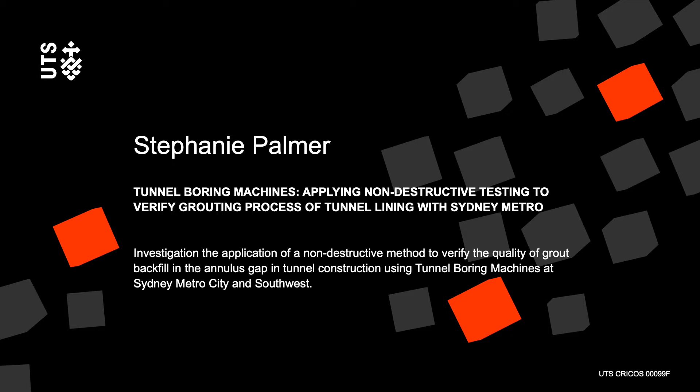Tunnel boring machines, applying non-destructive testing to verify grouting processes of tunnel lining with Sydney Metro. My name is Stephanie Palmer and I'm a civil and environmental engineering student.

Whilst working at Sydney Metro City and South West, I became absorbed in this once-in-a-generation tunnelling project. The scale was captivating and the enduring impact that it would have on shaping how Sydney-siders viewed public transport was tangible and exciting. In particular, I was intrigued by the structural fundamentals supporting tunnels, which are in fact monolithic underground structures.

Sydney Metro City and South West is Australia's largest public transport project, comprising 15 kilometres of circular twin tunnels, each with a diameter equivalent to 2 stories of an office building. Tunnel structural integrity relies on the segmental concrete lining. Concrete tunnel lining distributes external soil pressures across the circular tunnel shell.

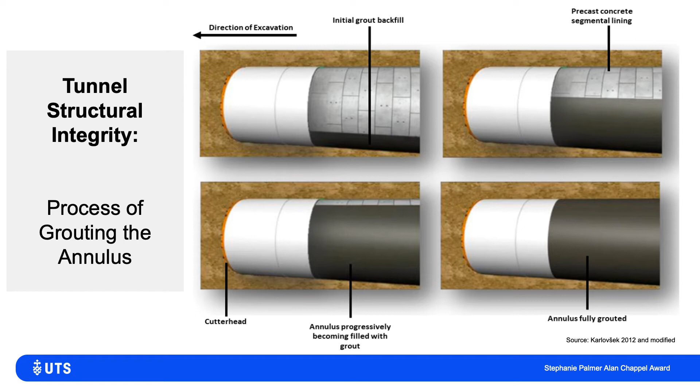Safe tunnel design is reliant on the uniform contact between this lining and the surrounding soil. Uniform contact is achieved by filling the circular or annular space between with grout. Any voids in the grout at this interface negate the purpose of this filling. However, undertaking quality control of the grout is challenging as the final product cannot be visually inspected.

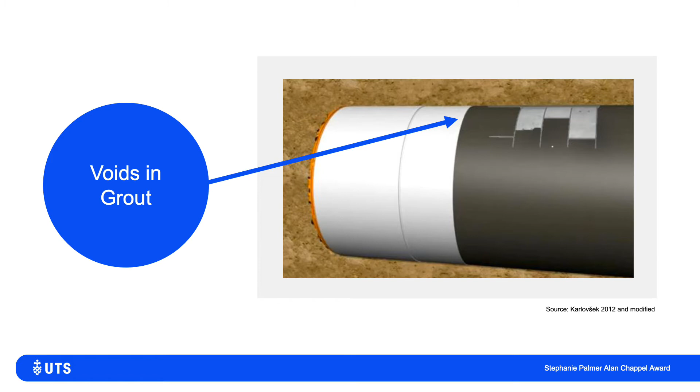Internationally, the accepted industry process to verify the completeness of grout in the annular gap is flawed, as it compromises the concrete lining by destructively drilling through it. To visually observe the gap, an endoscope is threaded through a hole drilled through the concrete lining. In other words, the only way to qualitatively check the annulus gap is to destructively drill.

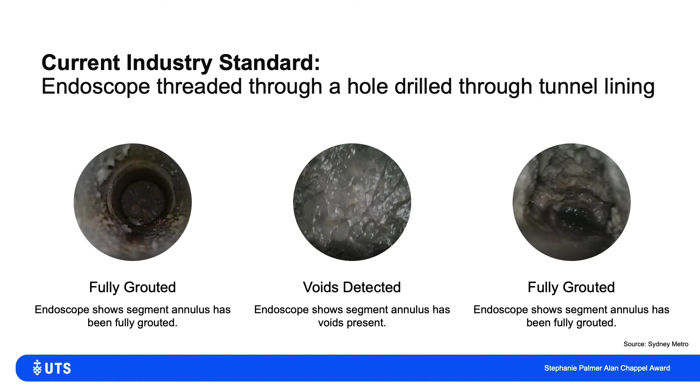This destructive method compromises the waterproofing properties of the tunnel lining, has the potential for cracking the tunnel lining, and as you can see by these pictures, only provides a very restricted view of the annulus. Given the inadequacy of the current industry standard, an opportunity to trial an alternative, non-destructive solution was presented at Sydney Metro.

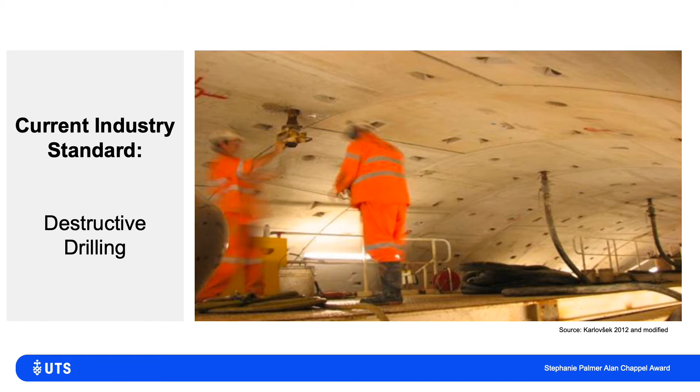Responding directly to this commercial significance, my capstone will investigate the slab impulse response method, innovatively repurposing an existing technology used in pile inspections as an alternative, non-destructive tool to assess grout quality behind tunnel lining. The slab impulse response method uses the impact of a rubber-tipped hammer to send low-strain waves through the test element. Once hit, the test element acts in a bending mode.

The movement, or bending, is received by a geophone, or velocity transducer. The load cell built into the hammer measures the force signal, and the geophone measures the velocity response. Both the hammer and the geophone are linked to a portable computer for data processing and storage.

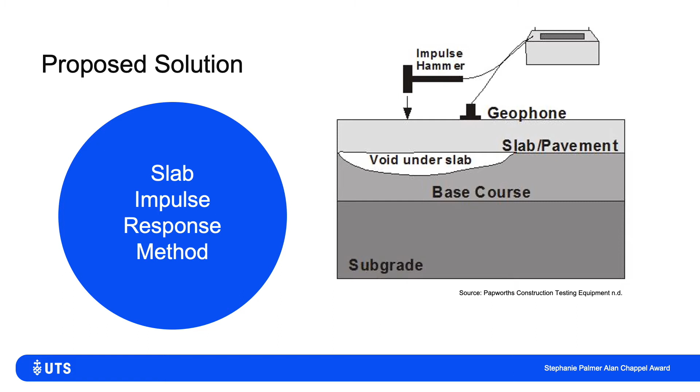If no void exists, the grout or soil behind the tunnel lining acts as a dampener to reduce bending in the segment. However, if a void does exist, the segment will not be supported behind the lining and therefore there is no media to produce a significant dampening effect. The presence of voids increases amplitude of vibrations and is measurable using the method proposed in my capstone.

The main challenge was to develop a methodology to verify the presence of grout behind the concrete segmental lining. Typically, data verification requires determining whether the data produced by the slab impulse response method accurately reflects the state of grout concealed behind the concrete tunnel lining.

Thus, verification monitors inconsistencies between the quantitative data from the slab impulse response method and the qualitative data through observing the grout. Gathering qualitative data would require visual inspection of the grout behind the concrete lining. However, the only way to visually inspect is to destructively drill. The concomitant cost and risk is precisely what my thesis aims to reduce and improve upon by examining the slab impulse response method.

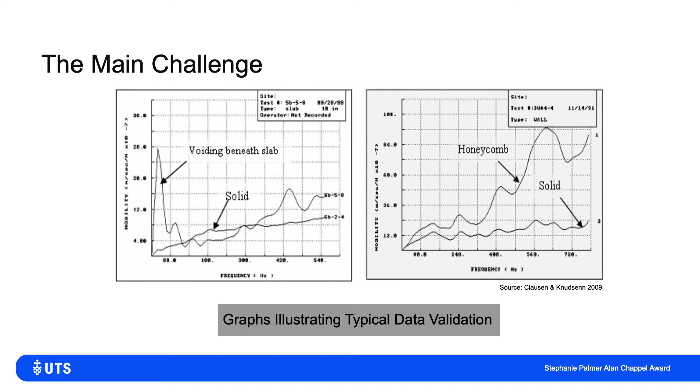The challenge for me was presented to shift my thesis focus from validating each and every data point by drilling to identifying another measure of success for the slab impulse response method. Ultimately, I determined that assessing the accuracy and repeatability of the non-destructive slab impulse response method was critical for confident in situ real-time testing.

I decided that the best way to measure accuracy is through what I call first-time right cases. That is to say that I linked actual grout volume data to the slab impulse response data. In addition, to assess the repeatability of this testing method, I analysed the variance of results.

My aha moment came during my research when, trawling through numerous academic and industry papers from around the world, it became clear that there were limitations to all methods currently used to verify the presence of voids in the grout behind tunnel lining. Thus, there was a genuine commercial need for a more effective and accurate method. I was spurred on by the realisation that my research at Sydney Metro had an opportunity to significantly contribute to the safety and quality of future tunnelling projects globally.

Industry interest in the slab impulse response is driven by significant efficiencies in cost, time, and labour savings, which together improve safety and commercial outcomes. The slab impulse response is able to rapidly sample a large area of tunnel and provide an indication of areas with voids in the grout.

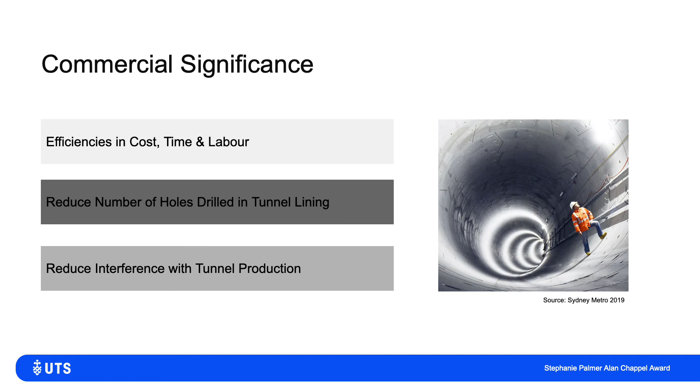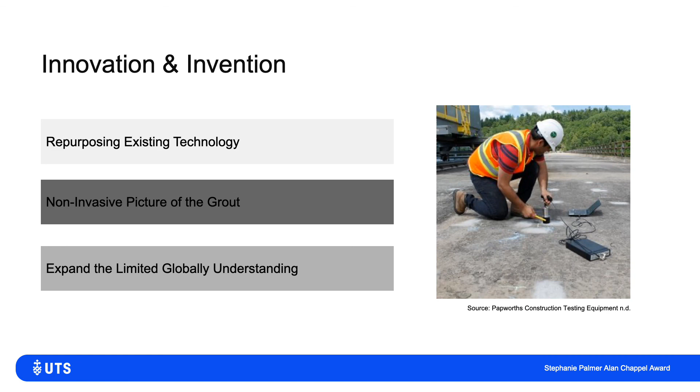The innovation behind the slab impulse response stems from repurposing an existing technology and adapting it to a new context. This enables it to be readily introduced to the tunnelling industry. The slab impulse response represents an improvement on an existing process by providing a non-invasive picture of the grout behind the segmental lining. My capstone will uniquely contribute to the breadth of understanding of the slab impulse response in a tunnelling context, which to date has been limited globally to a handful of projects in Argentina, the United States and Denmark.

Increasing urbanisation will necessitate more underground infrastructure globally and hence more tunnelling. Safety will remain paramount and hence the benefits of cost savings with respect to grout verification will only become more relevant. It is my hope that, given the number of tunnelling projects forecast in Australia alone, there will be more opportunities for in situ testing, increasing the pool of data and enabling us to quantify the benefits the slab impulse response can deliver both commercially and for the long-term structural integrity of our tunnels.